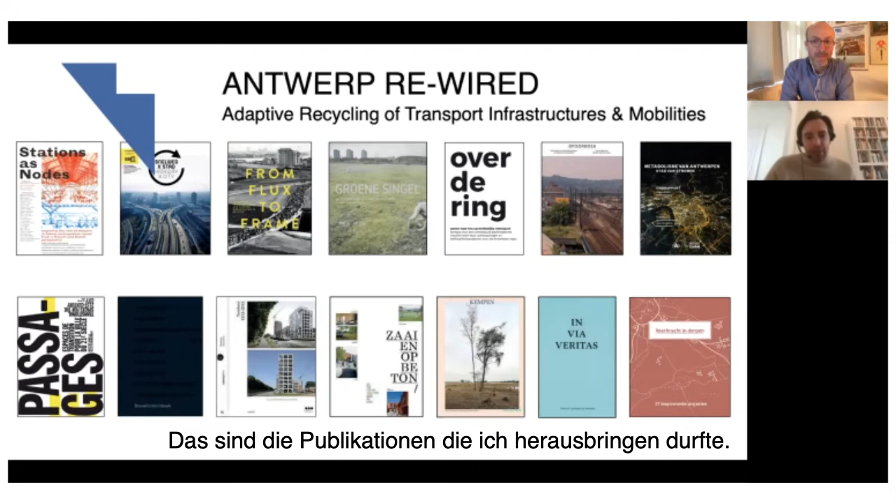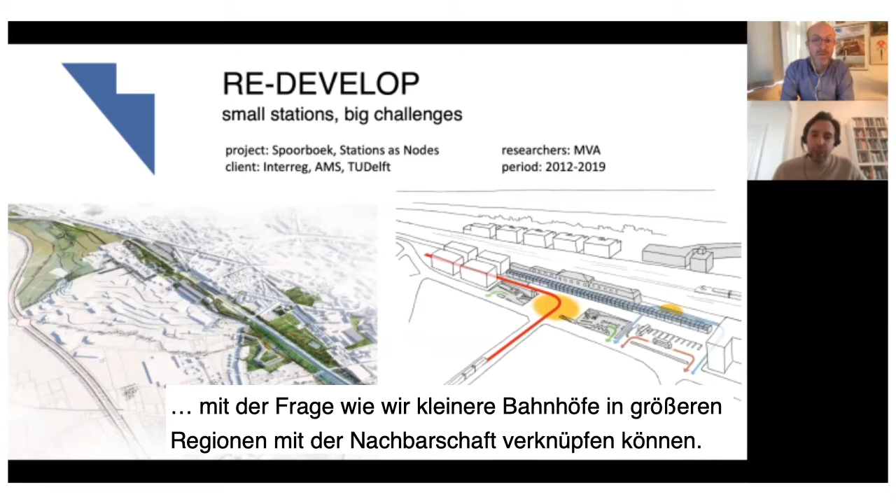I also saw that in your case, train infrastructure is very prominent. One of my latest books was on the transformation of rail stations, and another one with TU Delft on how we can transform small train stations in larger regions, and how we can reconnect them with the neighborhood.

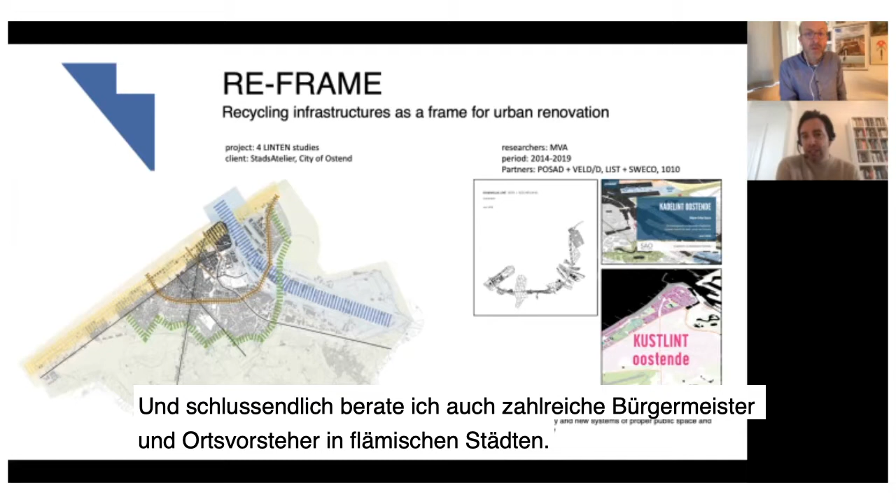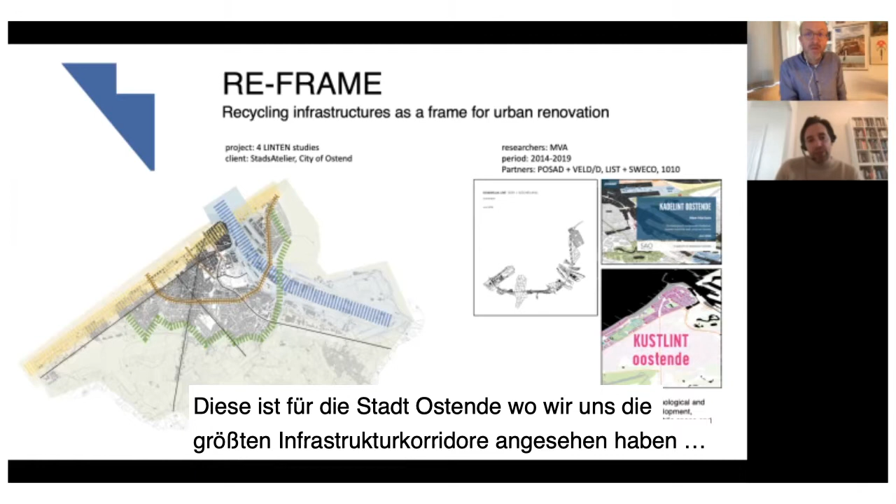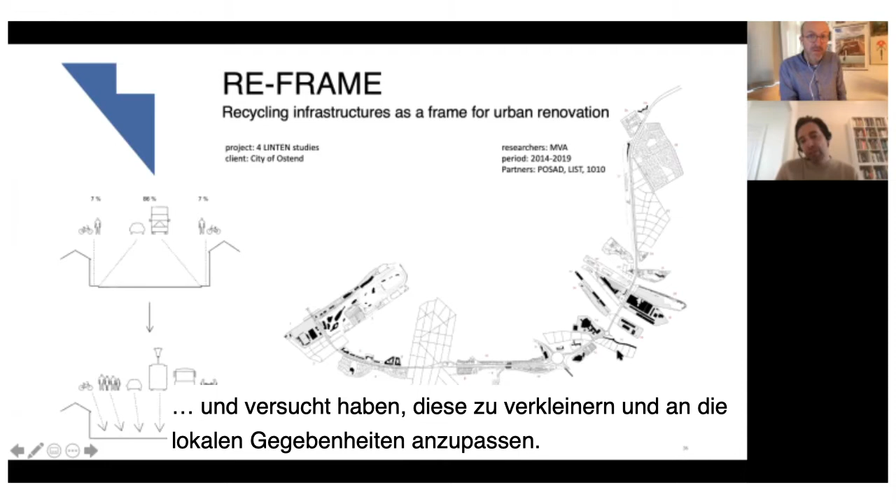Finally, I'm also advisor to several mayors and aldermen in Flemish cities, where I try to consult them on the integration of infrastructure. This one is for the city of Ostend, where we looked at the biggest infrastructure scars running through the city and tried to downsize them, adapt them more to the local situation, and return them to something more than merely infrastructure.

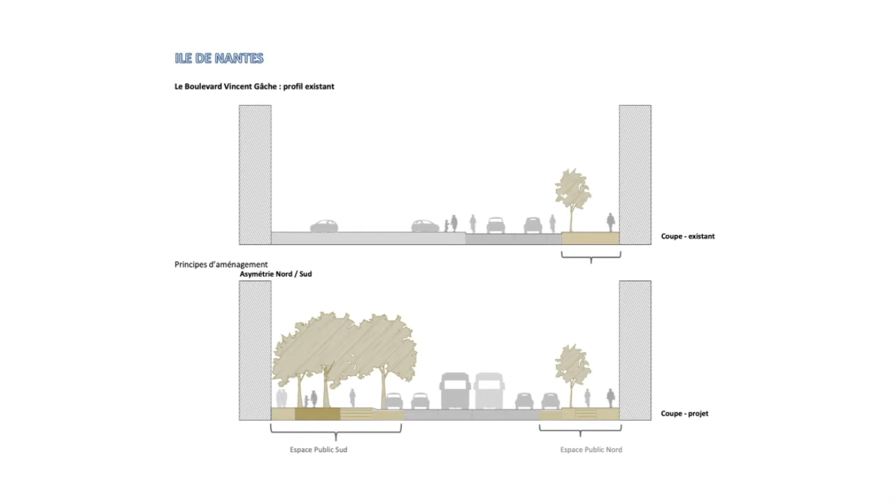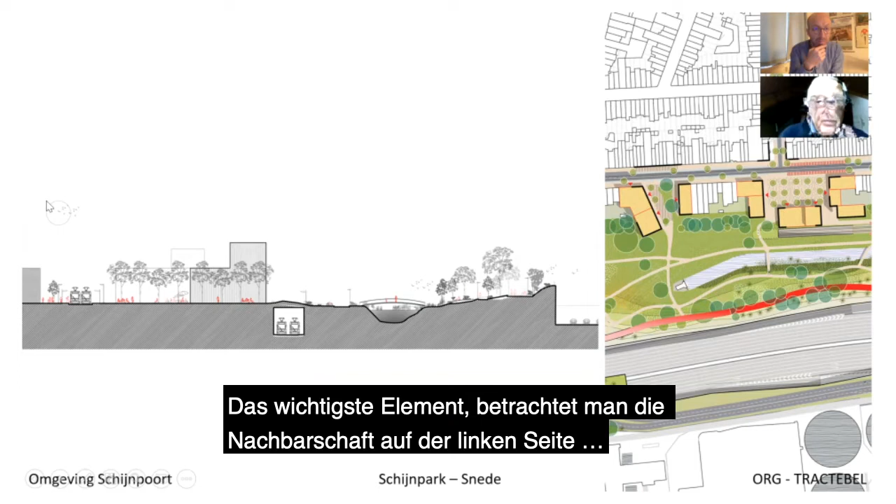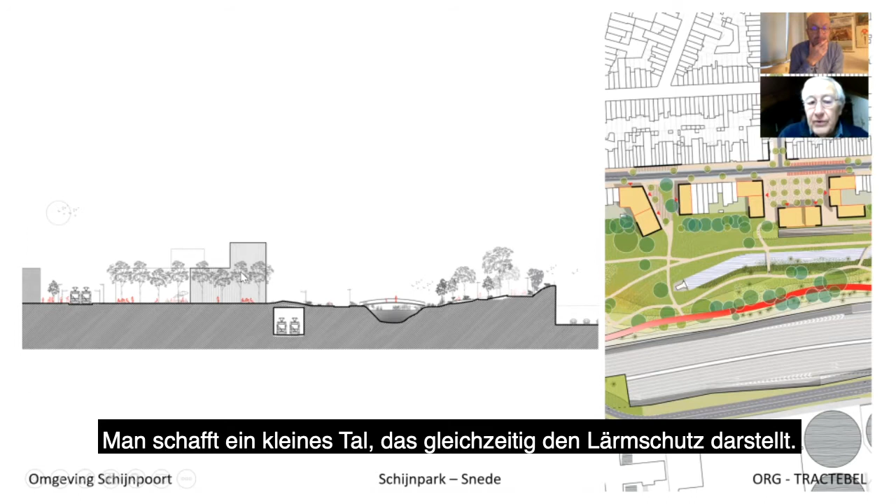The major element is that if you have this neighborhood on the left, you obtain a park about 100 meters deep, with the river in the middle of it, creating a sort of valley which is also used as a noise barrier towards the area. This kind of impression uses the existing investments needed in infrastructure to create a situation.

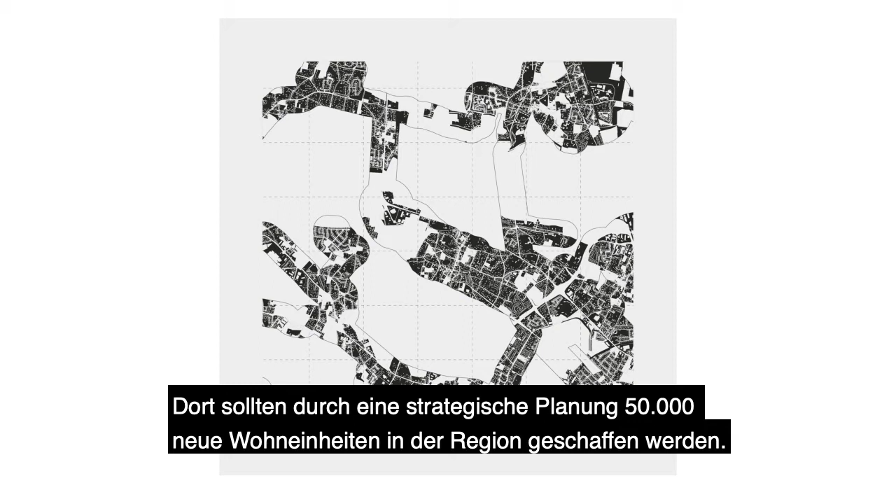Basically it makes the area better. We've been involved in multiple phases of transport infrastructure, from the initial phase of envisioning mobility as something more than functional, something that can really create leverage for the city and other neighborhoods. It started around 2010-2012 with a project in Bordeaux, France, where 50,000 new housing units would need structural planning implemented across the region based on a new mobility system.

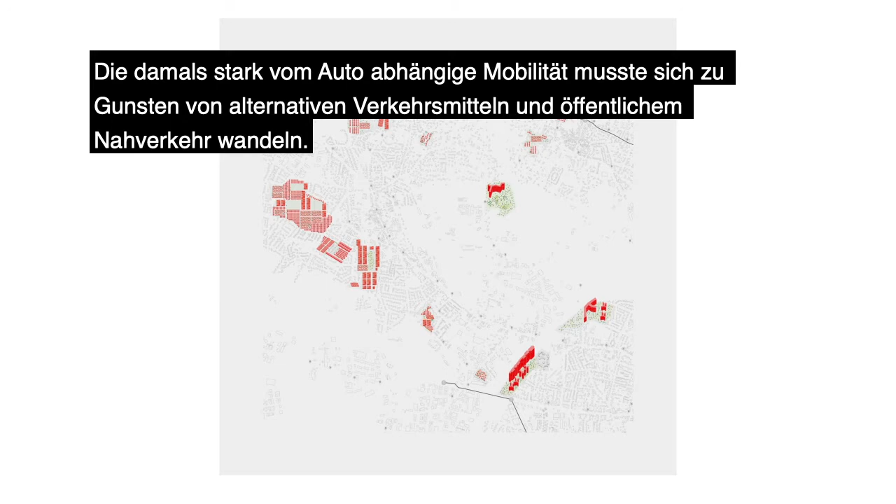This mobility system, which at the time was very car dependent, would also need to make a shift to alternative mobility and more public transport. So this is where we got involved in one of the first projects to think about what infrastructure can mean for the city beyond the functional aspect of a built network.

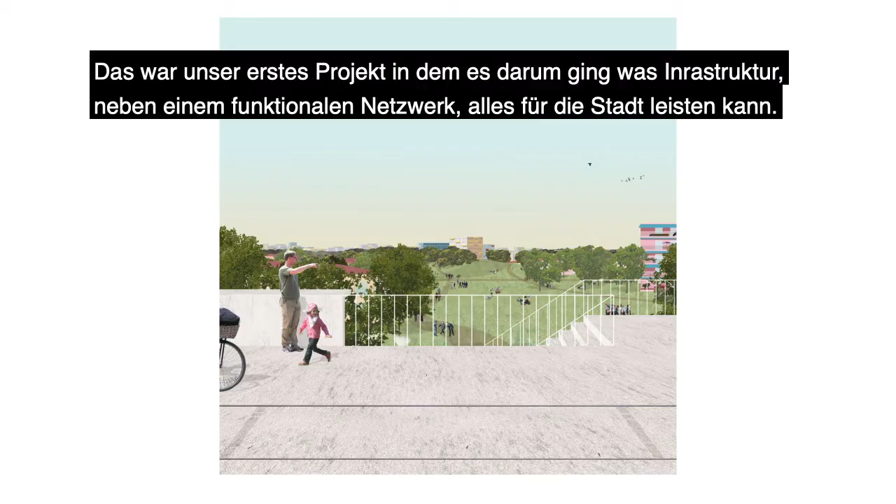We also looked into the notion or potential of the built networks that mobility infrastructure brings along—highway, public transport, soft networks, etc.—and to see them more as something that can be used as an operation to improve the city, rather than something you just need to implement and make functional.

The first phase in the process, which I found crucial in most projects, is to find a common ground. Finding or gathering neutral expertise which isn't biased is often key in my humble experience. I was responsible for trying to look at the health perspective: what is the impact of infrastructure on the health of local people?

It was an important trigger to combine all the different disciplines, all the different sectors to work together, from ecology over urban development, the financial experts, but also the different administrations. I'm sure also in Germany and Berlin there are a lot of institutes, a lot of governments involved in that kind of big infrastructure, and the challenge was to make them work together.

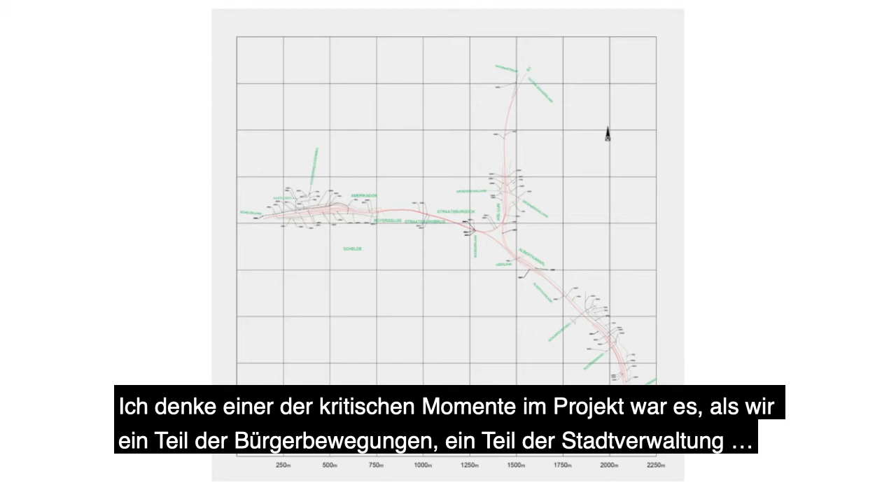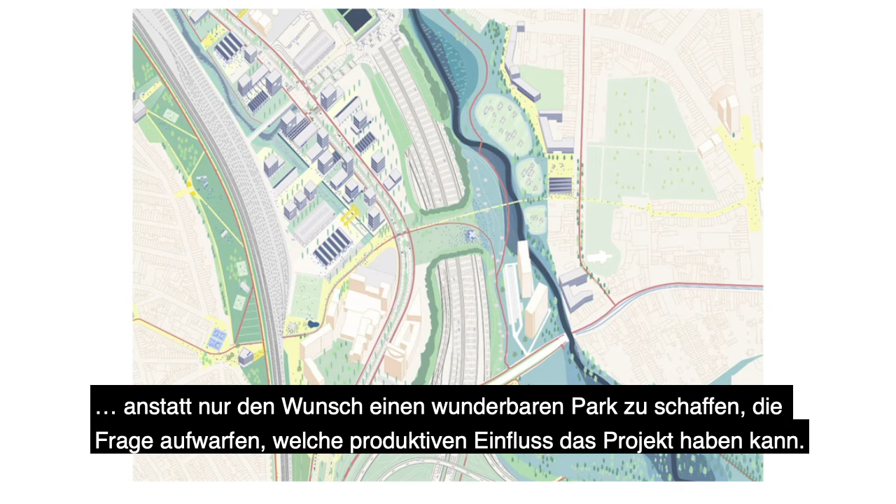I think one of the crucial moments is when - and it was not only us, it was part of the civil movements, part of people of the city, engineers busy with planning the project - the shift was made from just erasing it and creating a beautiful park, so to speak, into what productive aspects can a project like this bring along.

And then we're talking about: if you can implement a logistics center closer to the neighborhood linked to the infrastructure, both to the highway infrastructure and to the public transport infrastructure, then you avoid bigger trucks - which actually have a bigger impact on a neighborhood than the highway behind it - to pass through little streets or whatever. You actually allow them to have a hinge between the through-going logic of a highway, the high-speed logic, and the logic of a neighborhood, which is at a slower speed, which needs to produce another quality.

So all of a sudden, instead of just erasing something and creating a park, we were talking about a hinge, a logistical center for example, that could create benefits for a neighborhood, but also was part of this functioning of the flows in the city.

In the neighborhood next to it, or the surroundings, if there's for example a water problem - the fact that when hard rains fall the streets were flooded, the basements were flooded - which was also linked to the highway, because the highway infrastructure implemented a very hard rupture in the groundwater table.

But it's something that in the surroundings of the highway we could start to deal with. We could start to create answers by creating a water buffer, for example, and that water buffer could take up the overload or the problematics in the neighborhood. But that water buffer could then also function more as an ambient experience, a sort of water park or something that could start to function on a different level.

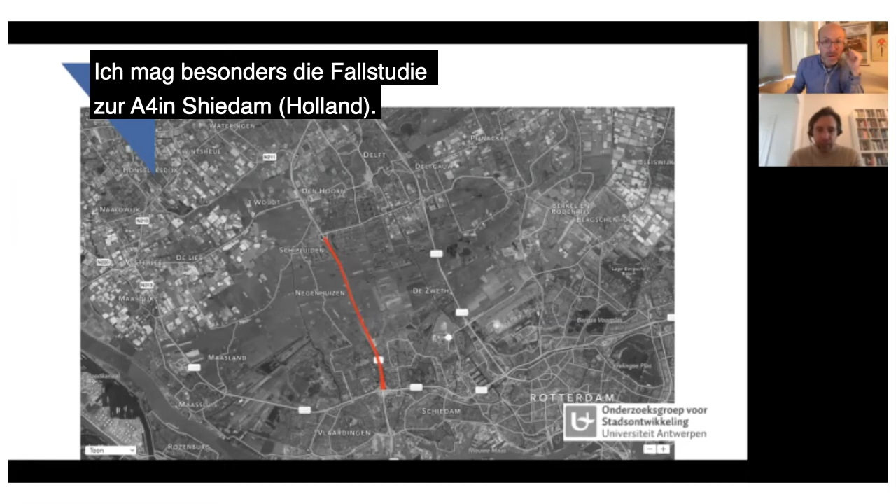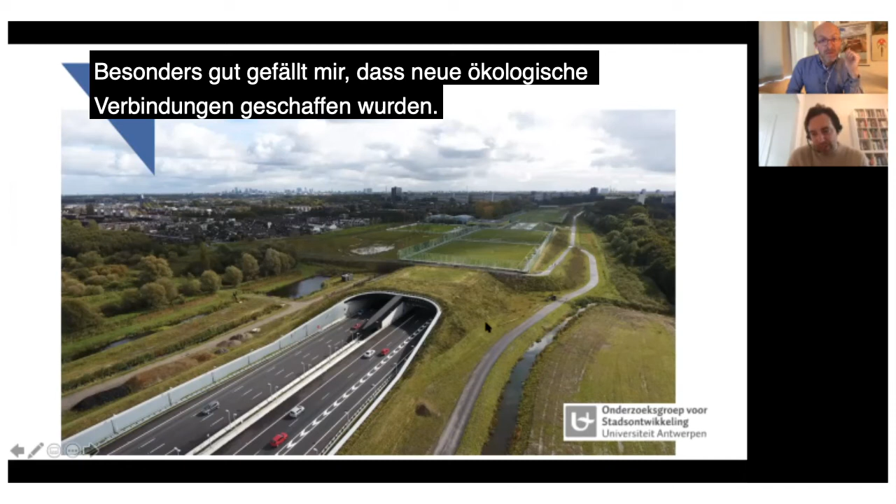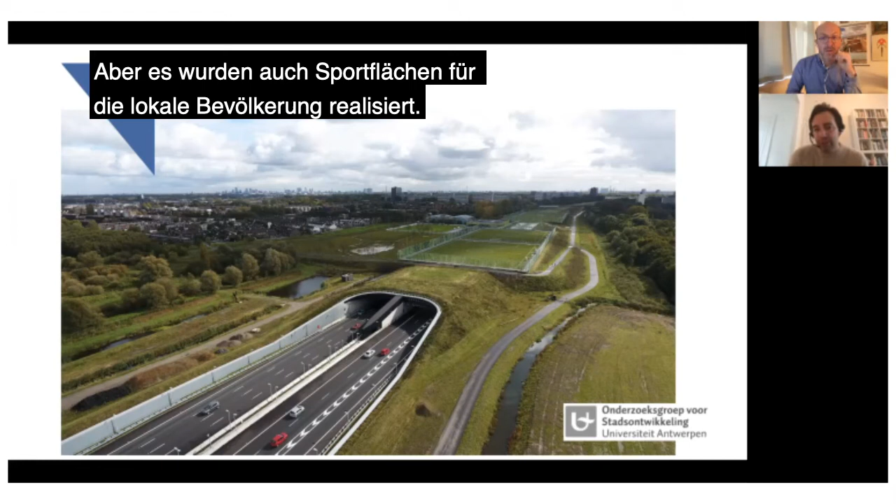I like especially the case study of the A4 in Schiedam. It's a chunk of national highway which was also tunneled. And what I especially like about it is that they used it to make new ecological connections between both sides - a very nice polder landscape - but they also inserted sport facilities for the local inhabitants, and they did it by using this kind of intelligent section.

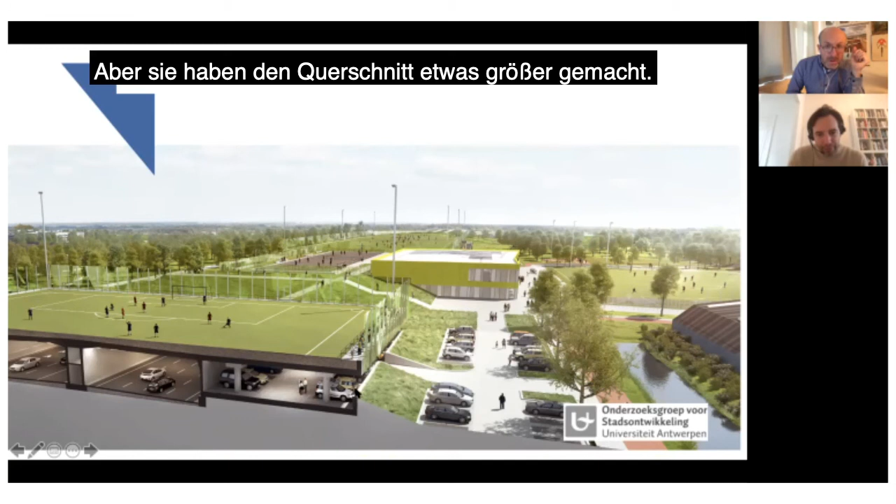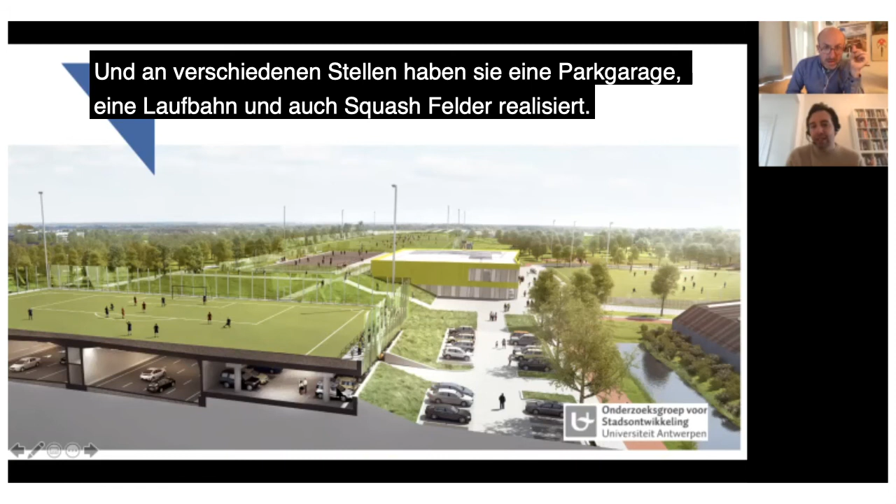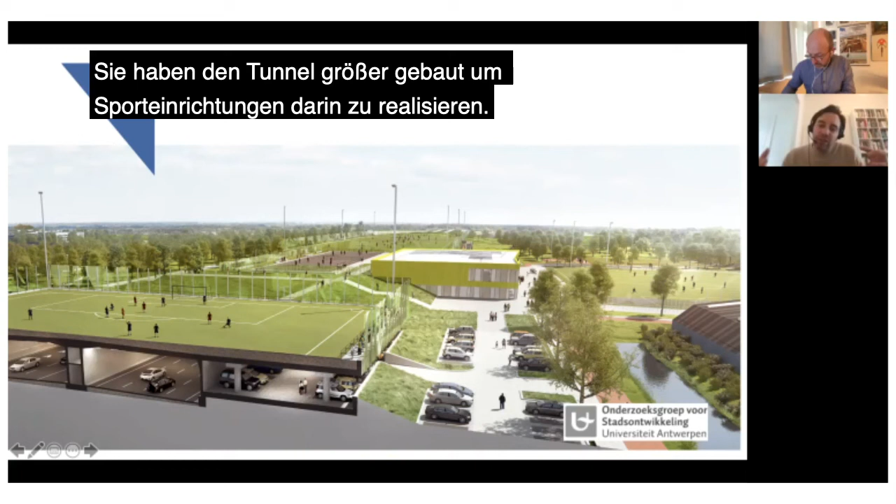As you can see here, this is the section they needed for the through traffic, in and out of the tunnel, but they made this section a little bit bigger. At some points they instituted parking in it, and in other chunks of the highway they put sports facilities in it, even a track and squash spaces in the tunnel. So they kind of over-dimensioned the infrastructure tunnel to insert sport facilities.

And finally, design the infrastructure future-proof - try to integrate or make space for technologies maybe we don't even know today. Mobility is changing, infrastructure is changing. We don't know how it's going to change, but make sure that the infrastructure you're designing, the section you're designing, is up for that kind of change.